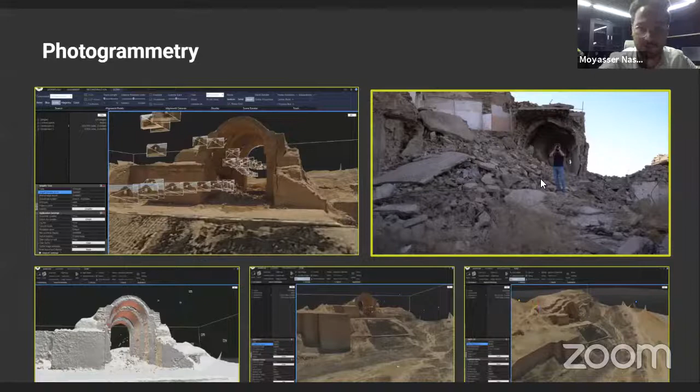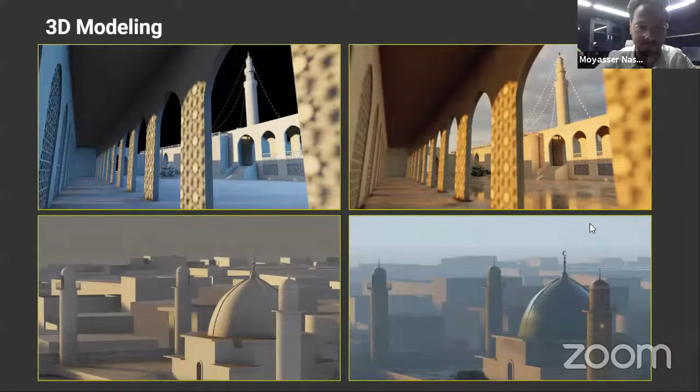A 3D model that will preserve all the details and make it available for sharing easily. The second way for our work was about the destroyed sites.

We were collecting the old data - documents, old photos, some old plans and sections - merging that together in 3D modeling programs, and making a simulation of what they used to be like in the photos.

We can see a clay model and a textured one for Al-Nabi Yunus Mosque. Also at the bottom you can see Al-Nouri Mosque before and after the textures.

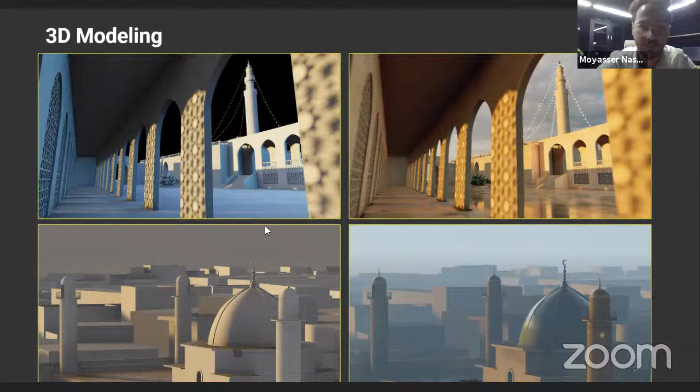So the pipeline for the process begins with 2D drawings to a mass model, then goes deep with the details and textures that model to produce the final result, which you can use in different ways to create a fully VR experience. Here we will see behind the scenes of some of our work.

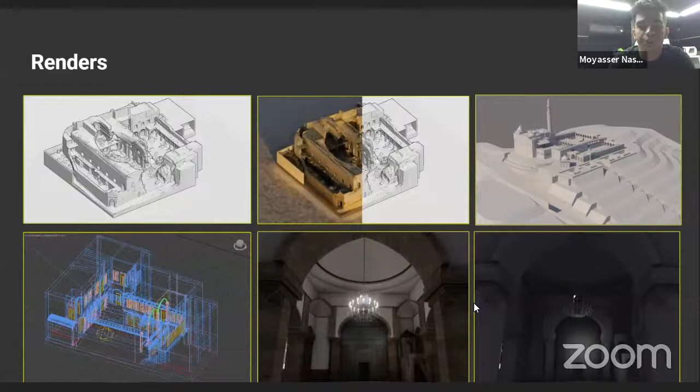We studied storytelling, because we wanted to tell a story correctly. We wanted to make people hooked to the content they were watching, more relevant to them, and actually relate to the content they were watching. That's why we had to expand our work further than the technical details of photogrammetry or architectural modeling, so we decided to study more about storytelling and the process of creating successful, engaging media.

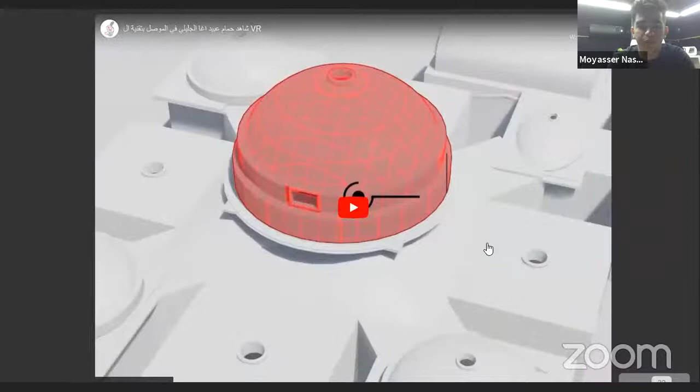Here's one of the videos we worked on and published on social media.

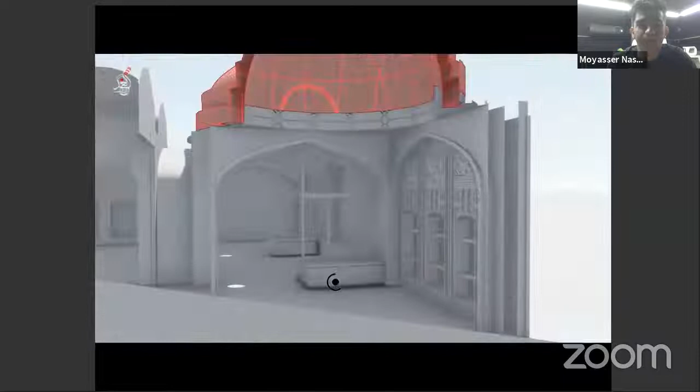As you can see here, we went to a specific place and decided to take multiple pictures of that bath. We were able to then polish that model and create its materials. Here's the mass model of that site that we reconstructed, which is clearly destroyed or very damaged. We were able to describe the unique style it was modeled in, all through different algorithms of taking multiple pictures and turning them into 3D models. We then took that model and rendered it in a way that tells a story.

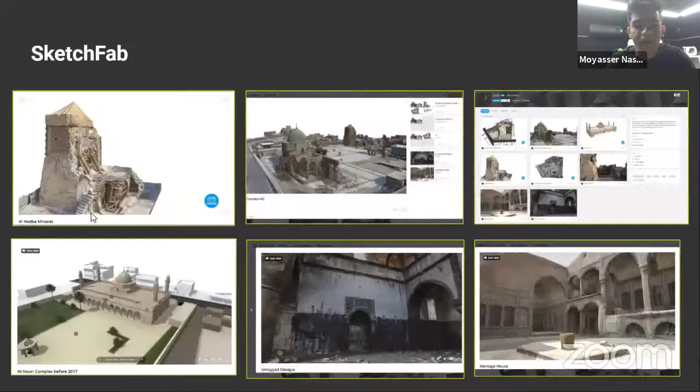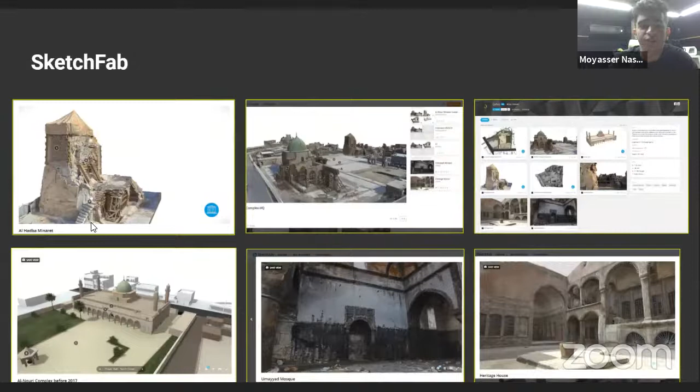And then we tried to expand even further. We went to Sketchfab and published our works there as 3D models, allowing everyone interested in viewing those sites to try them out, to view them in 3D, and to make our work more accessible, as the media had kind of limited it to projecting as 2D renders. So we wanted to have that option too, and that really came in handy later on.

Last March, UNESCO held a competition for the reconstruction of the historical Al-Nouri Mosque complex in Mosul, Iraq, a major component of UNESCO's ambitious projects for rehabilitation of the ancient city, Revive the Spirit of Mosul.

Due to the pandemic, the site wasn't really accessible to contestants to attend in real life to get a better understanding of it. That's where our collaboration with UNESCO came into hand, where we were able to provide all the contestants with 3D models of that site, to give a better understanding of it in the context of the old city of Mosul, so those architects could compete in creating a way to reconstruct that site.

We then explored a technique. Here's a video of our reconstruction of Al-Nouri Mosque that was produced and published in the competition.

Then we explored what is called virtual production. Now, green screen compositing has been out there for decades now, which is the process of keying out a green background, which is pretty boring, to be honest. We had to take that concept even further.

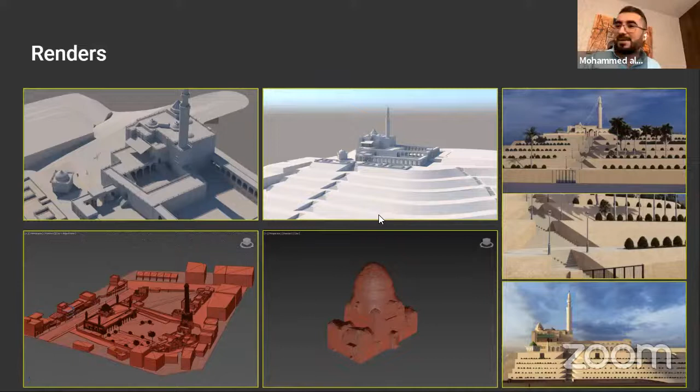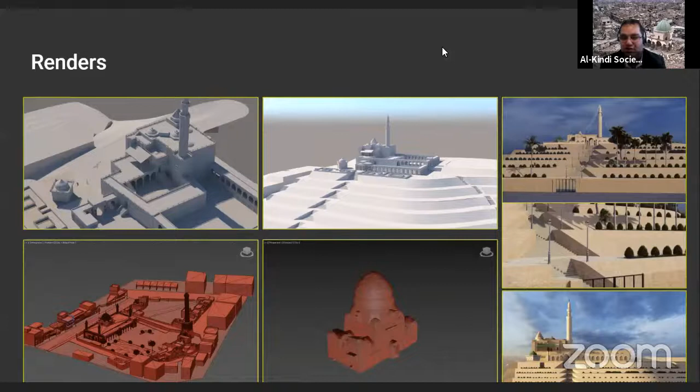Thank you to the rest of the team, Muyassar and Yahya, for this presentation. I'm keeping an eye on some questions coming in, and perhaps we can address one now before the question and answer session. I think it's a great positive that we see great interest from young Iraqi architects and engineers using new technologies to bring forward digital archiving and crowdsourcing, making information available to develop these models. We should not see that as a negative, it's actually a positive. I'd like to remind the audience to please write objective questions, and we should always be mindful of the language we use in our messages.

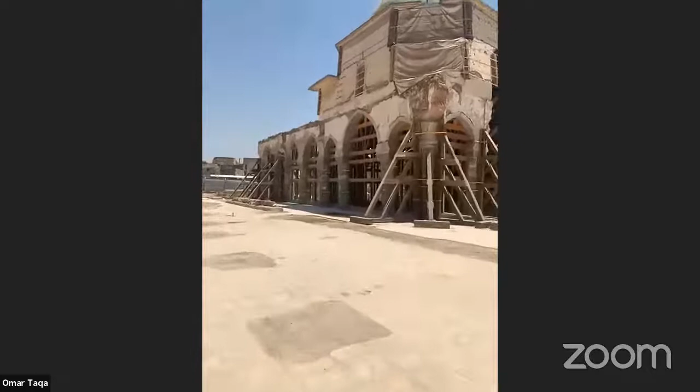Now we will move towards the mosque, which is the Al Nouri Mosque, Nouri famous prayer hall. In February 2019, UNESCO started with this project. We removed about 5,600 tons of rubble from this mosque, and some IEDs. Now we will enter the prayer hall.

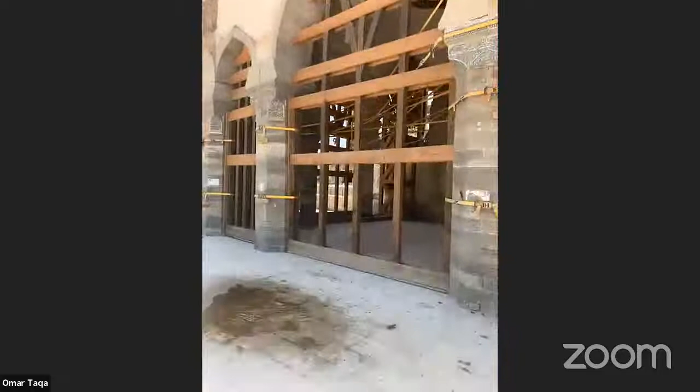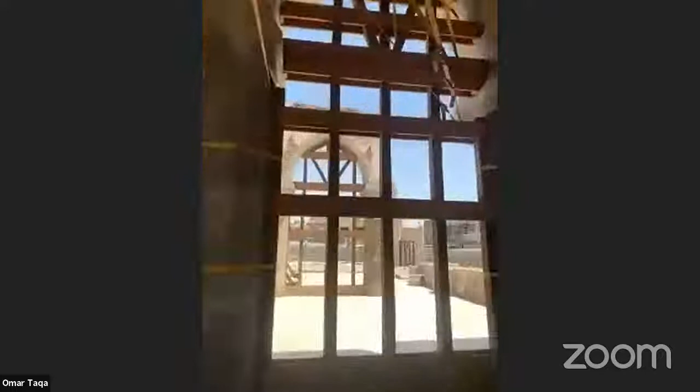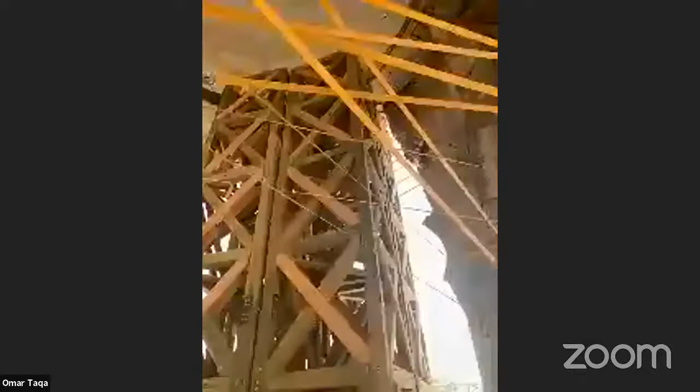This is the prayer hall of Al Nouri complex, where the Imam stands and speaks to people. This wood has been done to secure the remaining parts of the mosque and also of the minaret. Here you can see these wooden special sections to secure the dome, to secure the arches, and also to secure the pillars.

After that, we started with the documentation stage. This stage has been done under the supervision of the staff of the antiquities department, who also work here on site. This is the temporary storage in the garden, and also we have a warehouse. All the historical pieces are stored here, and my colleague Abdurrahman also from antiquities department.

Abdurrahman, Dean of Antiquities department, will give you an interview and a brief about the documentation that has been done in Al Nouri.

Hello everybody, I am Abdurrahman from the Antiquities Department of Nineveh.

Our work started by removing the rubble and then taking the stones from the mosque and putting them in the warehouse after documentation, all the pieces. We have bricks and the design of the minaret. Also, we have pieces from our excavating inside Al Nouri Mosque. We have divided and classified all the bricks, and this is the pottery that we found in the excavation around the base of the minaret.

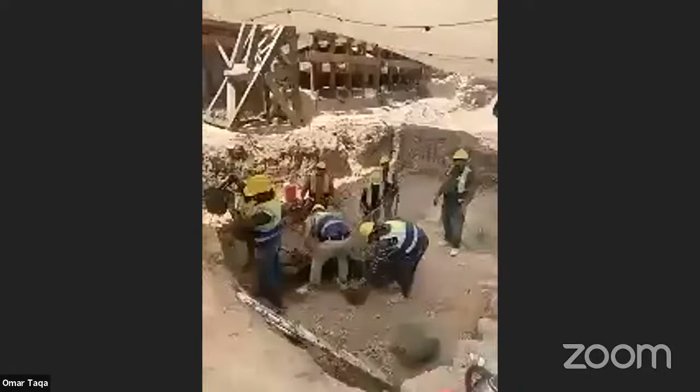Now working by hand with the workers, we haven't found anything yet, but we did find 4 levels of old houses belonging to the Atabeg era. Thank you very much.

Now, this is Al-Hadba leaning minaret that was exploded in 2017. It has 2 bases, as you see, the lower base and the upper base, and it has also been maintained with safety measures by Mr. Omar to secure the remaining part.

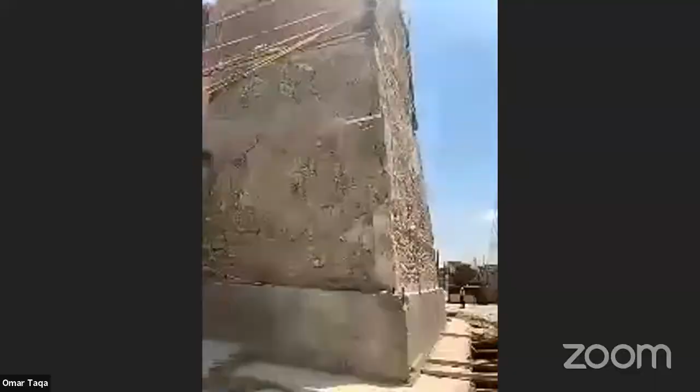Hello everybody, my name is Uthman, and I'm an architect. I work at Nouri Mosque as assistant site coordinator. I will share my screen now.

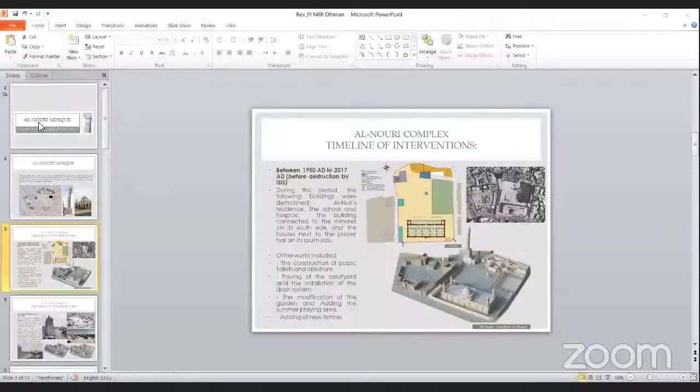I will speak about Al Nouri Mosque and Al Hadba Minaret and the complex in general. Al Nouri Mosque is one of the oldest mosques in the city after the Umayyad Mosque. The mosque was built between 1170 and 1172 in the Atabeg period by Nur-ad-Din Zenki. It's one of the most important landmarks in the old city, and the people consider it as their identity.

The Nouri Mosque is located in the old city, in the northern sector of Mosul. The complex is surrounded nowadays by traditional houses, and it was established on a wide land area. This land was chosen by Nur-ad-Din Zenki at that time.

The complex contains the following buildings. The first is the Nouri Mosque, the prayer hall, here it is, and Al Hadba Minaret, located on the northeast side of the complex, and also the fountain for ablution here, used for washing before prayer. There are also some houses in the north and east of the complex.

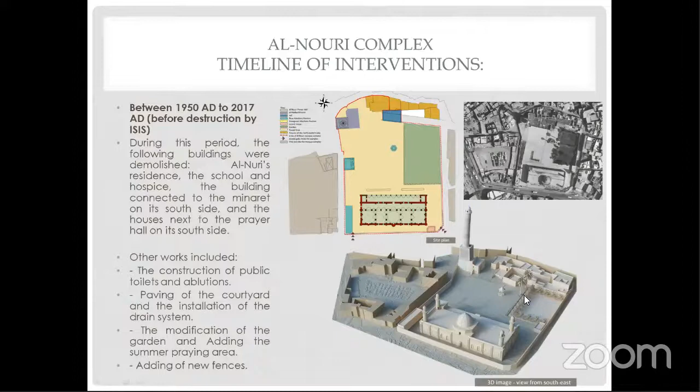And for the mosque, it's destroyed most of it, but still part of the eastern wing and the dome remain.

For the prayer hall, the Sunni endowment demolished it in 1945 and rebuilt a new modern mosque with dimensions of 20 by 50 meters. The new prayer hall contained a flat roof with four minarets, as you see here in the model.

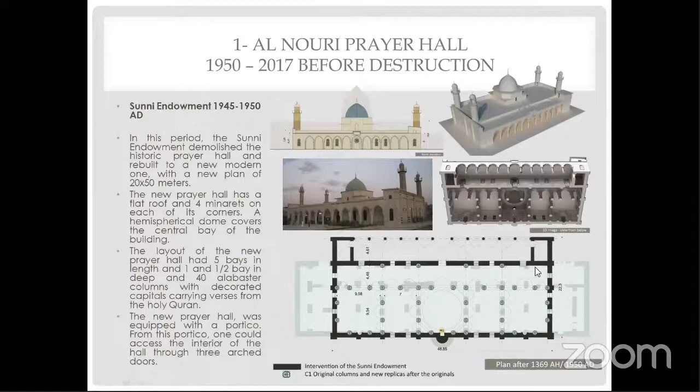And the layout of the mosque has 5 bays in the long direction, and 1 bay and a half in the width direction. Here we can also see a new corridor was added to the prayer hall. This was not existing before.

Here we can see the prayer hall and the demolishing by ISIS after the explosion. Here this is the remaining part, and here we can see the wood also that we put to establish the remaining part of the mosque. This is before putting the wood, and here this one after adding the wood. The only remaining part is the dome and a part of the right wing of the mosque.

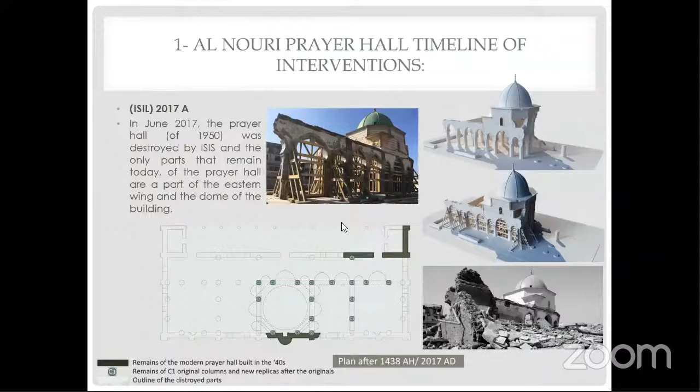For the intervention that happened to the minaret, the Al-Hadba minaret didn't suffer many interventions like the mosque. It saved its shape for 850 years, and here we can see some interventions, some few interventions.

The first one was in 1172 to 1925. There's an addition adding some decoration faces. They added decoration faces for the upper base of the minaret. This base did not contain decorations before, but they added them at this period.

And the original entrance is here, and there's an entrance also here above 6 meters from the ground, and also there was an entrance from the building that was next to the minaret. Here we can enter from this. All these doors were closed at this period from 1172 to 1925.

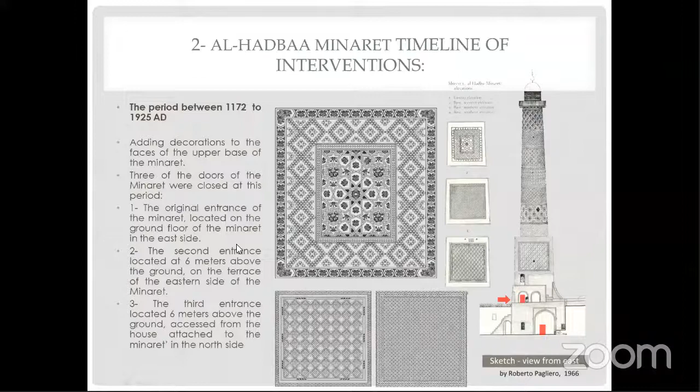And here we have also another intervention, between the Directorate General of Antiquities with the help of the Fondedile Italian company, between 1979 and 1981. In this period, they put a 1.6 meter height concrete structure built around the minaret. Here we can see it in the photo. This structure was concrete to maintain the base of the minaret, and also they added some radial iron tie rods

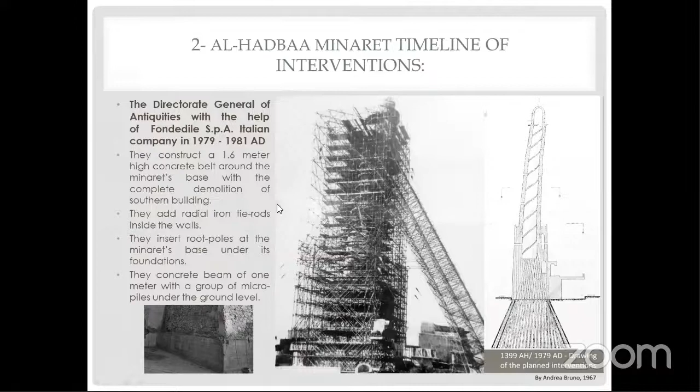inside the walls of the minaret to make them strong, and they inserted also root poles inside the minaret base under the foundation. And also around the base of the minaret there was a concrete beam, and as we see now, Abdurrahman from Antiquities was showing us the root piles inside the foundation of the minaret. All these interventions were done by Fondedile in 1979 and 1981.

The last intervention that happened to the minaret was the destruction by ISIS. The destruction of the minaret affected the entire shaft of the minaret and part of the upper base of the minaret. As you see, the base of the minaret contains two bases. The first one is the lower one, built from stone and gypsum, and the second one is built from bricks, and also the cylindrical part was from bricks. All of this part has been demolished.

And here we can see the safety measures that we did for the minaret. Also, we put here some monitoring system to see now, and at the site we are putting some monitoring system to see if there's any inclination or any movement with the minaret.

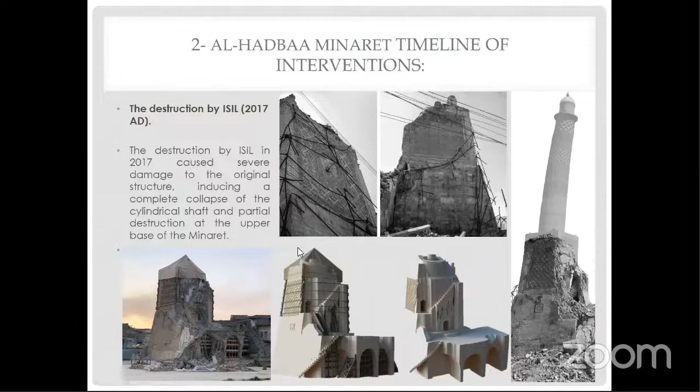Good afternoon, everyone. My name is Omar. I'm a civil engineer working for UNESCO as a focal point for the restoration of Al Sa'a Church. We are here today in Mosul, and I'm going to take you on a quick virtual tour of this convent.

The Latin Church, or the Dominican Fathers Church, also known as the Church of Dawar, is a Catholic church located in Al Sa'a neighborhood in Mosul. It's considered one of the most famous churches in Mosul and one of the important landmarks of the city. It was partially damaged in 2016.

The construction of the church began historically in 1866, and it was finished in 1873. The famous tower you are seeing now was finished building in 1882. The church consists of two domes of equal size and a large hall accommodating hundreds of worshippers, in addition to the choir. The church also contained a huge organ opposite the altar, which was one of the first of its kind in the region. This convent also housed the first school for girls in Iraq, and also a healthcare center before.

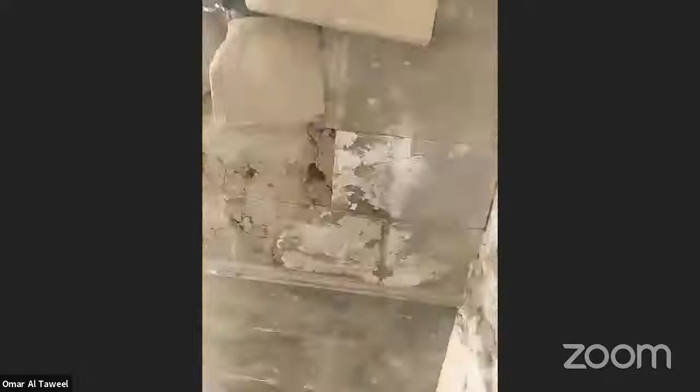UNESCO started the reconstruction and restoration of this convent last September. It has been through many phases. The first phase was cleaning the site, which was challenging because it contained a lot of explosives and tons of rubble, about 1,600 tons of rubble. It was removed in the first phase. Securing the site with fences and security cameras was also done in the first phase.

We are now in the southern part of the convent. I'm going to show you a part of the destruction. This part used to be the refectory and the library. Before it was like this. And now it's gone.

We are now doing a topographical and architectural survey. Our colleague Mohammed is using high technology devices for doing the measurements, and he will give us a little summary about that.

Good afternoon, Mr. Mohammed. Can you give us a summary about your work here? Hello everyone, my name is Mohammed. I'm an engineer working for a company that specializes in laser scanning. Today we are in this beautiful church to get the 2D and 3D models of this church.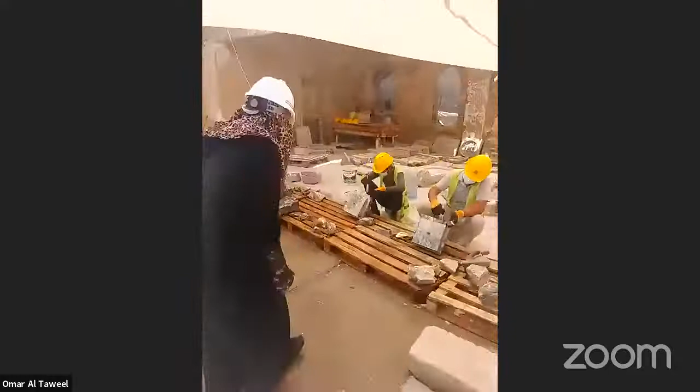My name is Mariam Siraj Abdullah, and I'm an archaeologist working for the Iraqi Ministry of Culture in Nineveh, currently part of the committee supervising the restoration of Al-Sa'a Church.

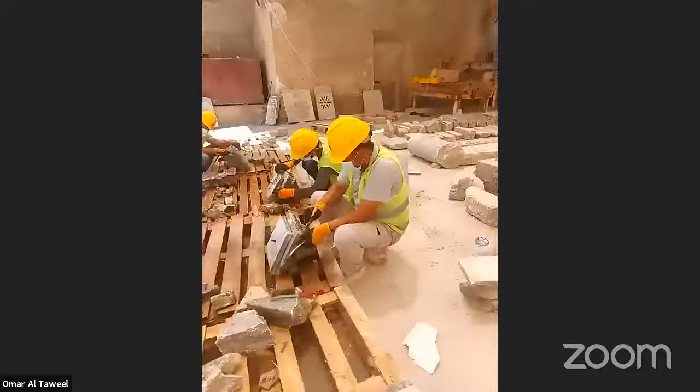We are now at the workplace, and as you see, we are working now on cleaning the stones. After the cleaning, we start with sorting the stones, each according to its type.

After that, we'll do the specific documentation and sorting for these pieces to prepare them to move to the final storage.

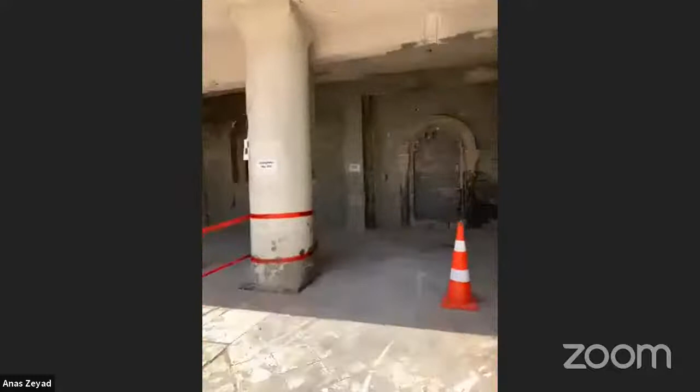So far, we have already started the second phase. We have a team of Italian experts working on the final design and the bill of quantities. We have completed all the drawings for emergency stabilization measures. We hired a local contractor with Moslawi workers, creating jobs for more than 175 Moslawi workers. Now I will take you to the storage of the Ministry of Culture.

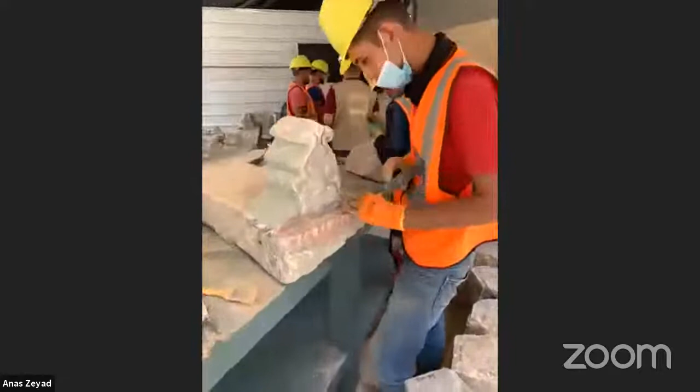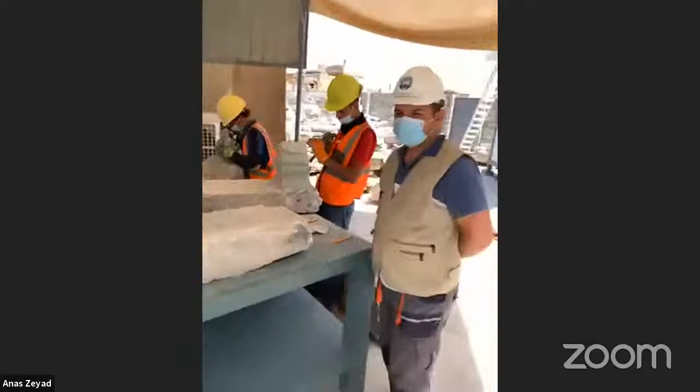Those are the pieces of the columns. We store them in order to use them in the final steps of reconstruction. This is the storage of the MOC. We have workers here working on a daily basis. They are cleaning the layer of paint. And here is Mr. Ali from the Ministry of Culture.

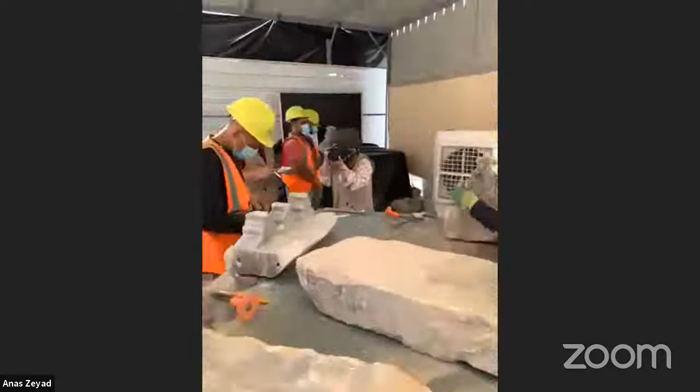Could you please explain the work here? He explained that after completing the process of sorting the stones from the rubble, they now clean the stones and remove the paint and bonding mortar stuck to them, then document these pieces, classify them, and store them in the warehouse - so that after collecting the stone from the rubble, they do documentation for the pieces and then store them, in order to use them in the reconstruction.

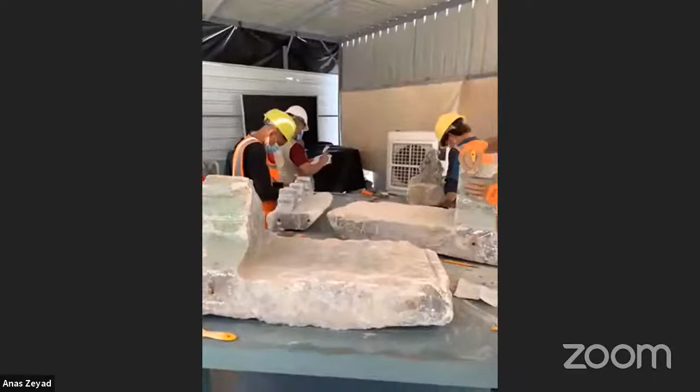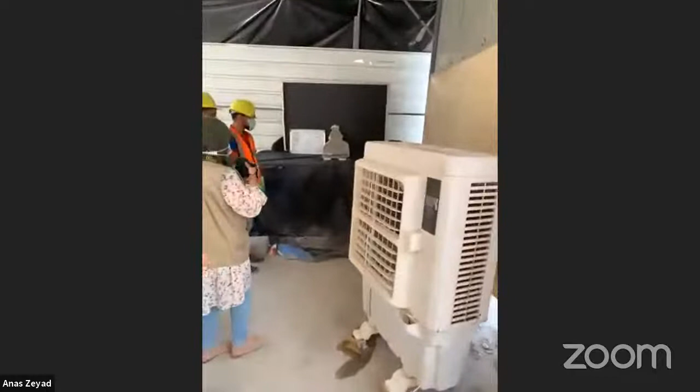Mr. Ali explained they currently do cleaning, then documentation and photographing of the pieces with dimensions and damage noted for each piece. After completing the documentation process inside the storage, they give a code for each piece.

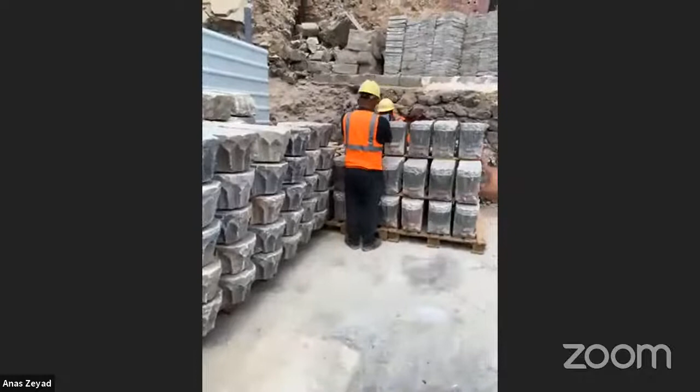So he was just saying in general we have different kinds of stones for each part of the church. They are so important to reuse because it's like the identity of the church.